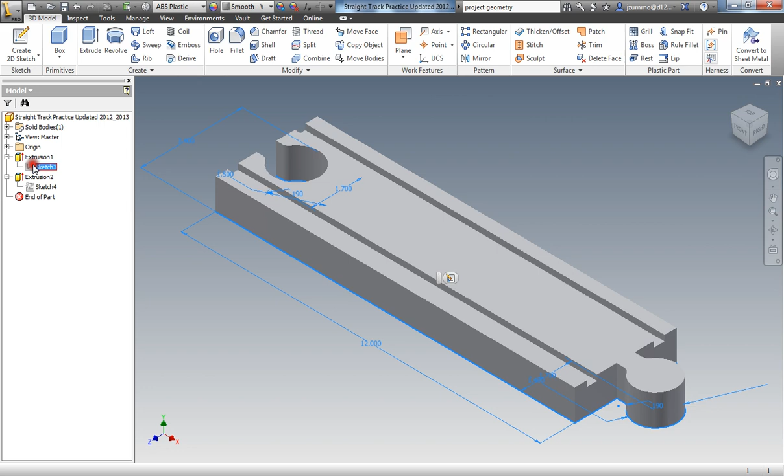I'm going to go over to Inventor real quick here and just show you a finished part. I have put this part together with the updated dimensions. It's pretty simple to make. We basically have this first sketch here. And you can see those numbers and the locations of these pegs and all that. And we extrude that at 1 inch. Of course, that'd be the thickness for our track piece.

And then we make another sketch on the back side of our part where we place some rectangles here, dimensions of 0.35 and 0.188. It's actually 0.1875. If I click that number here, you can see it's 0.1875. And then of course that is a distance of 0.4 from this corner to this corner here, and on both sides.

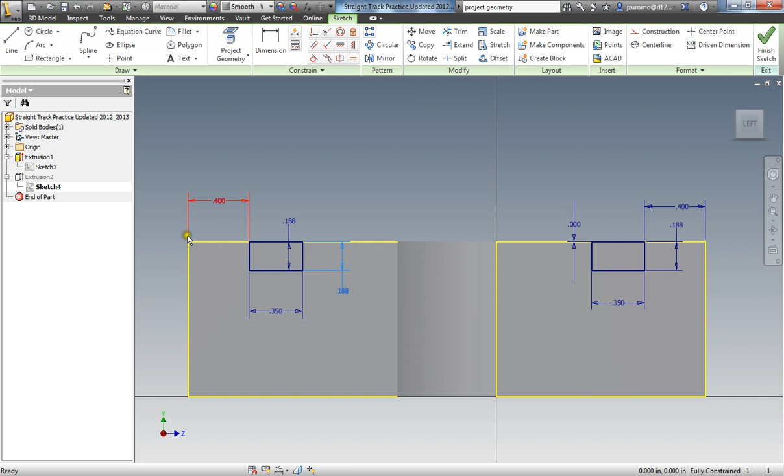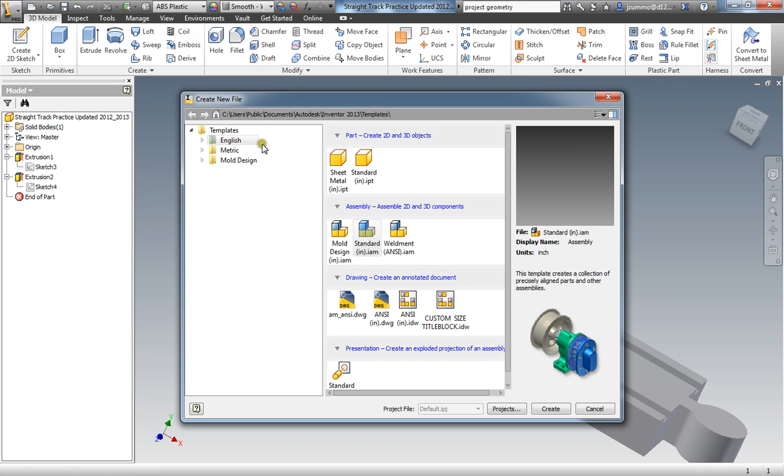Alright, once you have finished that sketch, you will then extrude it all the way through the part, and then that is it. And then of course set your material to ABS plastic. So I'm going to go ahead and create this part step by step for you. First I'm going to start off by saying new part, English tab, standard inch, IPT, create. I'll then create a 2D sketch, and I like to start off on this XZ plane, this flat plane right here. I'm going to select that.

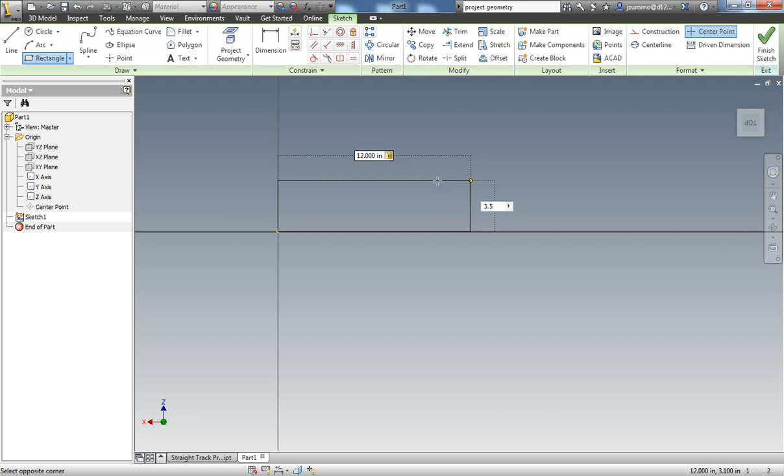And I'm going to pan over a little bit, getting my center point origin down in the lower left hand side. And I'm going to lay down a rectangle first. I'm going to click at the origin point and drag up and out to the right, and then type in 12 inches on the top, and then hit tab on my keyboard to switch to the other dimension, which I would like to be 3.4 inches. Once I have that number typed in, I hit enter, and here we have the beginning of our profile.

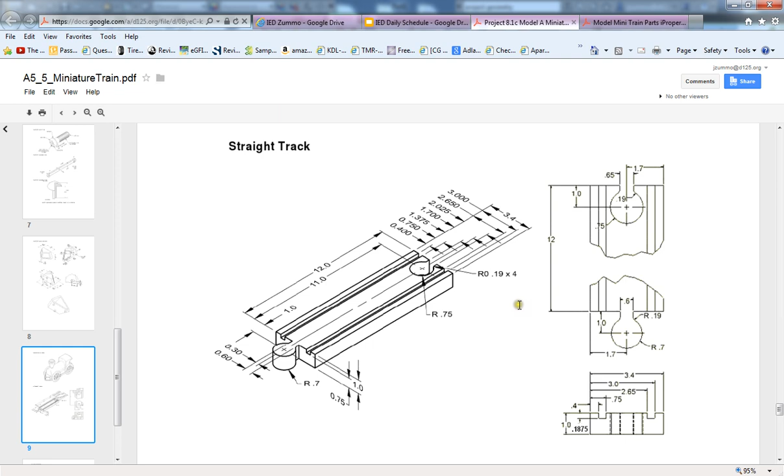I'm going to jump back to my other original created part. This is what we are going for, so I'm going to basically recreate this on our new part. I will start over here and create this cutout section here for the connector. If we look at our documentation, they actually have a little cutaway view here of a closer up detail of what that would look like. This is the outside portion over here. This is the inside one that I'm going to create now.

Basically what we're going to be concerned with is laying down a circle that has a diameter of 1.5 inches. This 0.75 is the radius, so a circle of 1.5 inches, and then we will locate it at 1 inch off the edge here to the center, and 1.7 inches from this center to this edge here, at which point I will then make some lines and offset them at a distance of 0.65, and then trim up and cut out and extrude that portion.

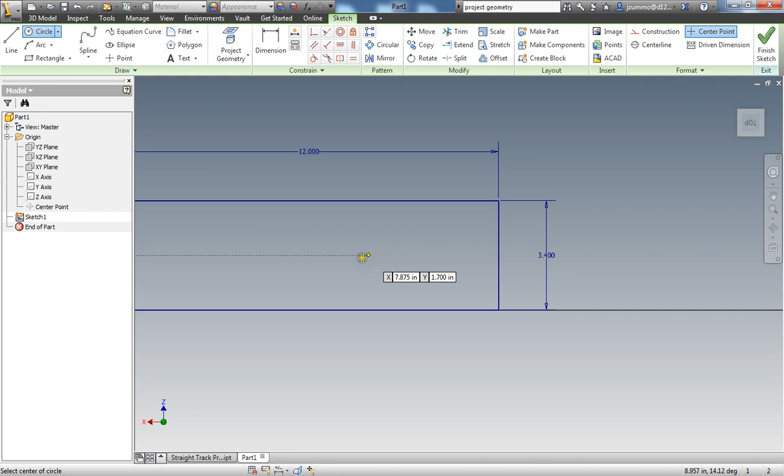So I'm going to jump back over to Inventor here. So again, I'm going to start off laying down a circle first, 1.5 inches in diameter. I will then dimension that circle into place.

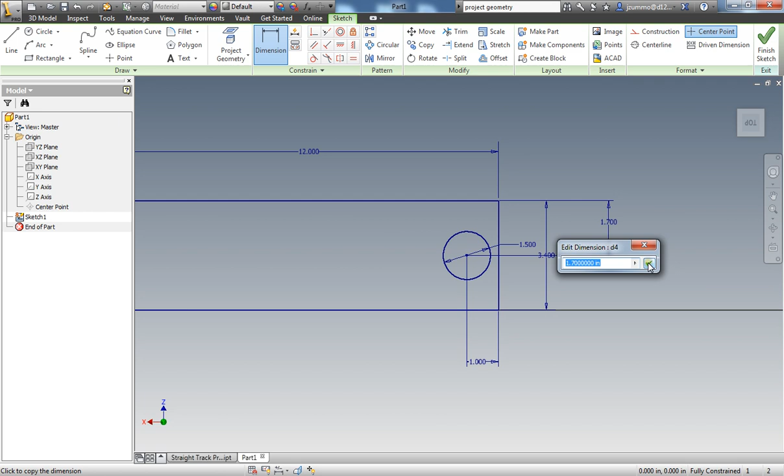That dimension here will be 1 inch. And from the center point to the outside line here, I'm looking for 1.7. I had actually placed it on that midpoint line originally, so that dimension is fine just the way it is. Now I will first place a line from the center point and just drag it out at any old distance past this line here.

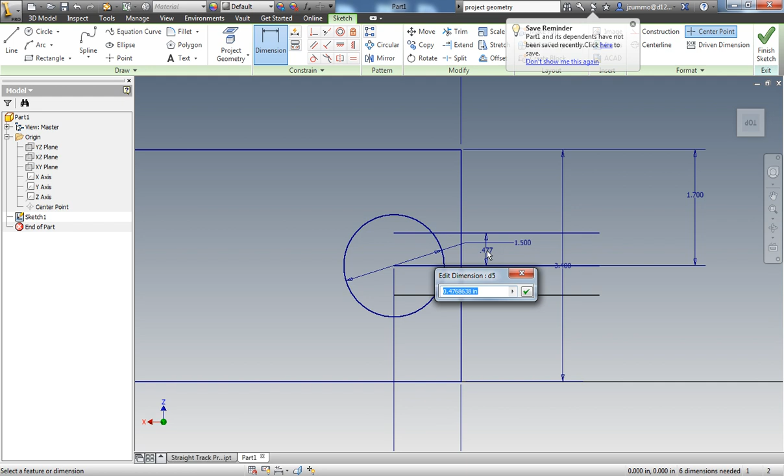And then what I'm going to do is use my offset tool to then select this line and offset it at any given distance. And then I'm going to come back in and dimension this line to that original line and say that that distance needs to be offset at 0.325, and then do the exact same thing to the other side, 0.325.

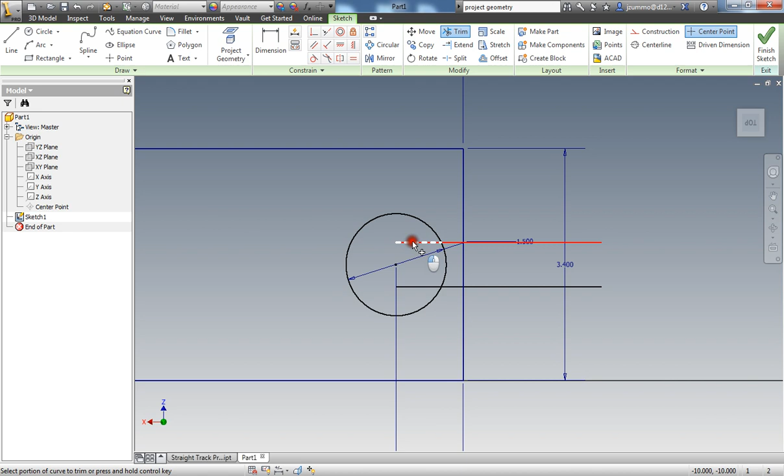And now I can trim away everything I don't need anymore, and I will have this side all wrapped up. I'm actually going to delete this middle line first because I don't even need it there. It'll just make trimming a little bit easier, and I can trim all of these edges out like so.

The next thing here will then just be to add that fillet around this edge here. Again, that new number for this here is going to be a 0.19. Then I'll select this portion of the curve and then this straight line here, and again on the other side to finish that off. Alright, well, I have this side of the sketch completed. I will now go over to the other side,

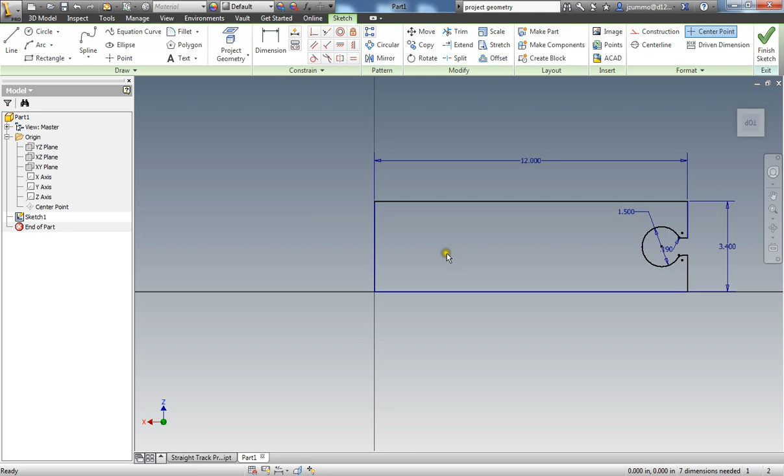and I'm going to go take a look at my documentation. And we have the same location for the hole this time from the edge, just going in the other direction off the part at 1.0 from center to this edge here, 1.7 from the center to this edge here. And then of course remember that we are now changing the radius to 0.7.

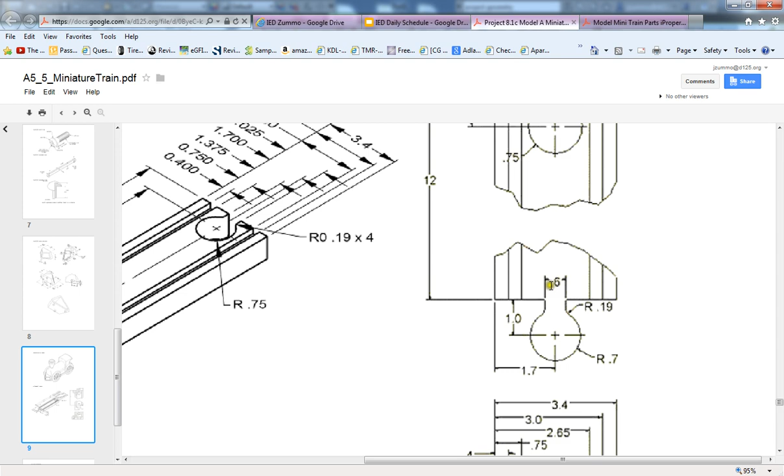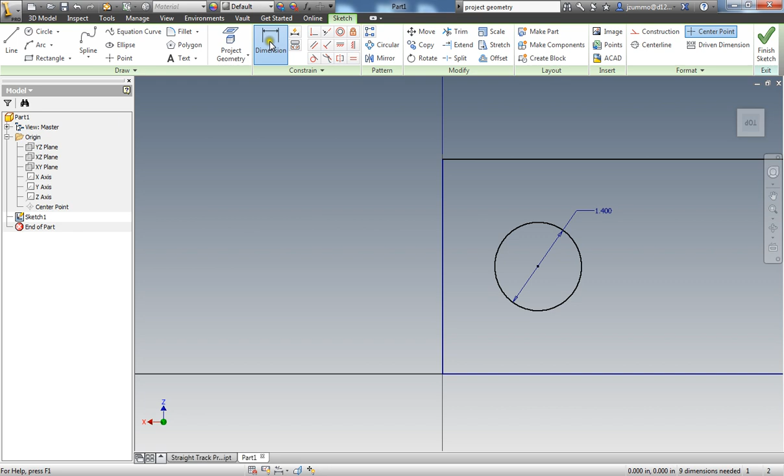And likewise, another change I forgot to mention earlier is that the distance between the flats inside of here is going to be 0.6, whereas up here it was 0.65. So I'm going to go ahead and start to make this portion. We'll lay down a circle first. It will be a 1.4 inch diameter circle. I'll then dimension it properly from center to here at 1 inch.

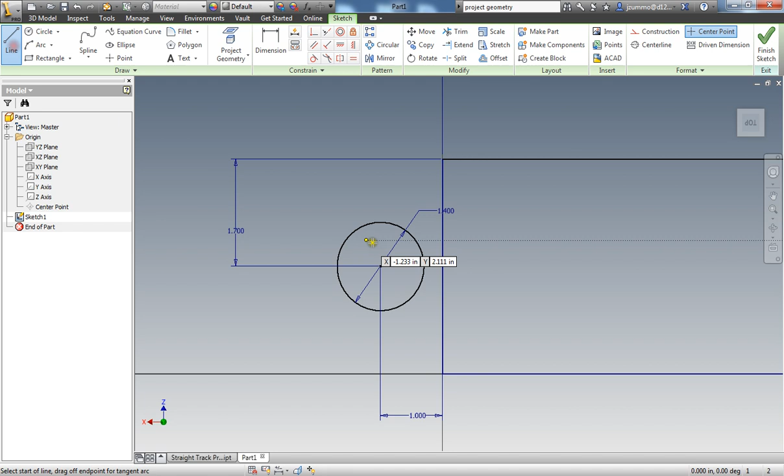Wait, actually, what I need to do, so I'm going to select the center point of the circle and drag it to the outside. That'll just make it easier to dimension. Now I can go from center to this line here, drop it down and say 1 inch. And then from the center to this line here at 1.7. Okay. Again, I will take a line from the center and bring it into the part.

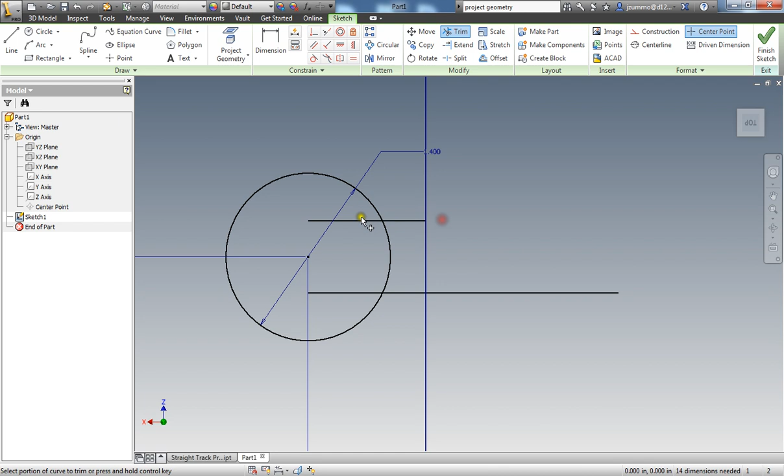I'll then offset that line in both directions, top and bottom, and then come back and dimension that distance. We had said that the distance between flats was 0.6, so if we cut that number in half, it'll be 0.3. So dimension both of these sides to 0.3. And then again, it's the same process, just clean up. So I'm going to delete this line first, and then trim out what I don't need. And there you have it.

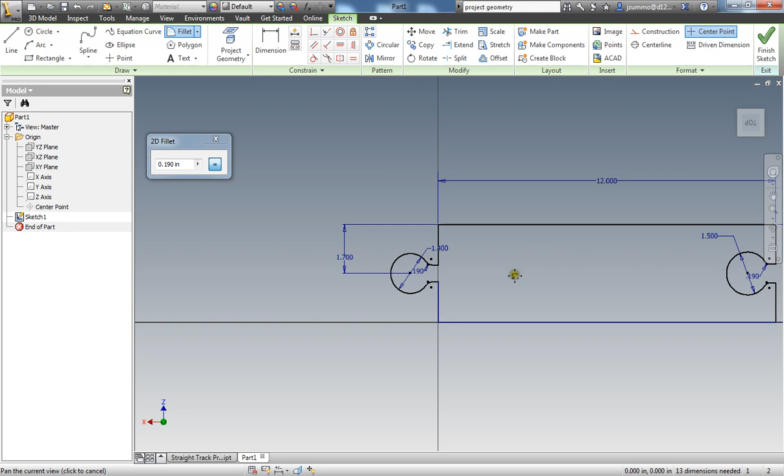Now I need to fillet these edges inside of here. 0.19. And at which point my sketch has now been completed. I will then say finish sketch. Hit my home icon here to zoom me out a little bit. Next, I can extrude that profile upwards at 1 inch and say OK.

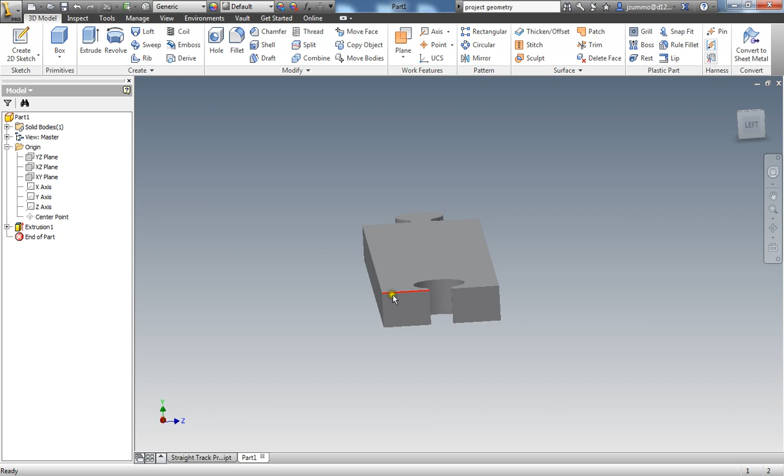And lastly, I will then need to create the rectangle profiles on the back side here to extrude them through the part and forward. First what I'm going to do is I'm going to project the geometry on this side so I can get both of those yellow boxes that you see here. I will then create my rectangles inside this area here.

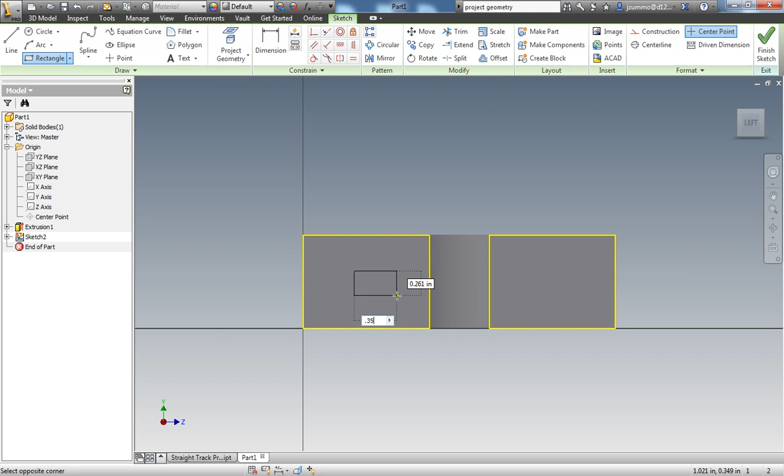The numbers for this need to be 0.35 along the bottom, and on the side it needs to be 0.1875. Just going to go back here and double check those numbers, and that is what we're looking for. If we do the math here, the difference is 0.35 and 0.1875.

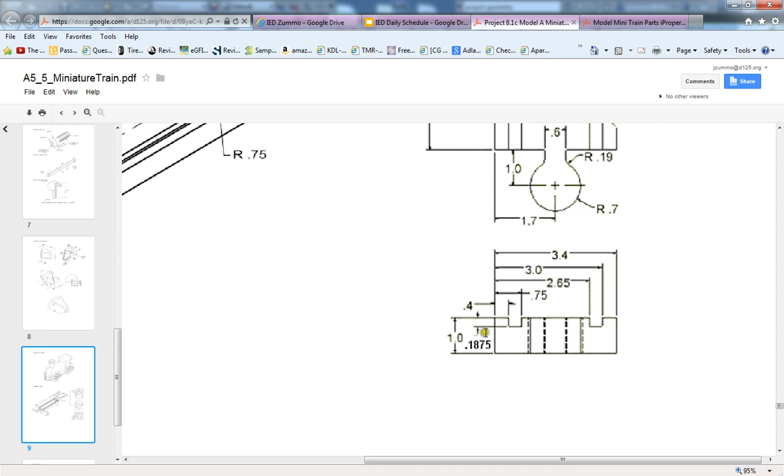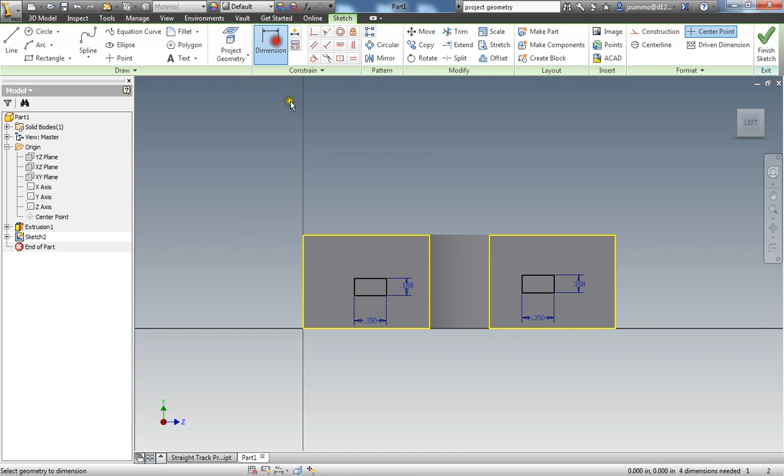Once I have that rectangle created, I'll actually do this other side over here as well. So 0.35 along the bottom, hit tab on my keyboard and type in 0.1875. And now I'm going to dimension both of these profiles into place. I will select the top line and the top line here, place that dimension and say it should be 0. I will then go sideline to this sideline here, and of course that needs to be 0.4.

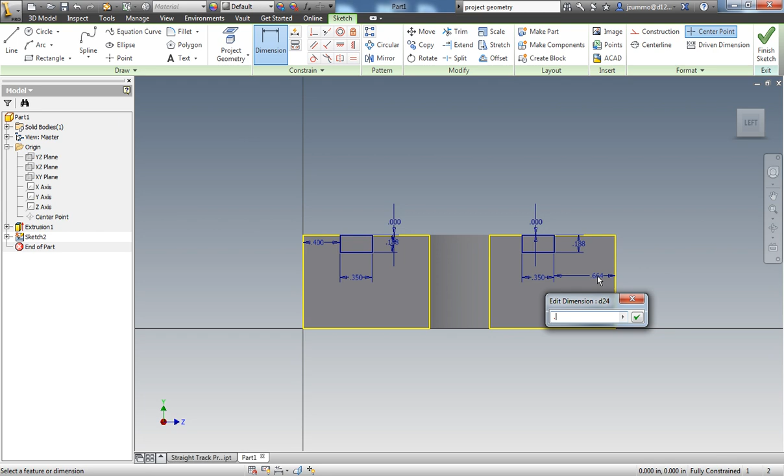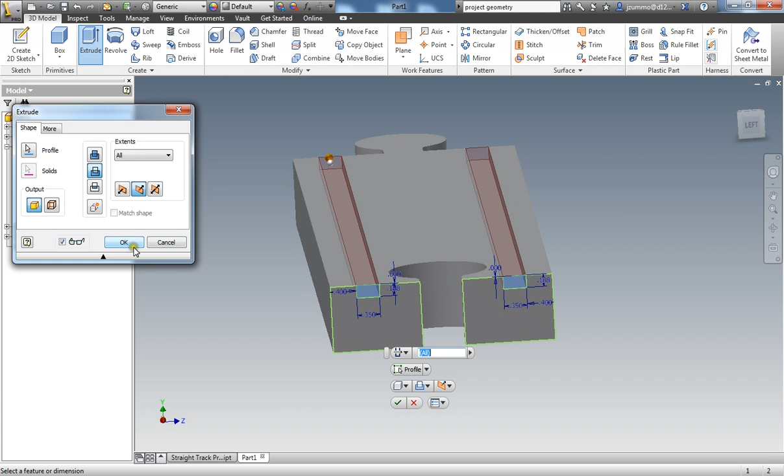I'll do the exact same thing to the other side. 0. Drop it down and 0.4. At which time I can now say finish sketch. And then I will simply extrude both of those profiles and cut them away from the body and set my extents here to all. They will then be pushed all the way through the part. I can then say OK. And we have our completed straight track piece.

Real quickly, I'd like to double check my iProperties. Switch over to the physical tab. I do need to set my material here, so I'm going to change that to ABS plastic. And here we have our numbers that have been generated. I'm looking at a mass of 0.1494, an area of 128.580, and a volume of 39.012.

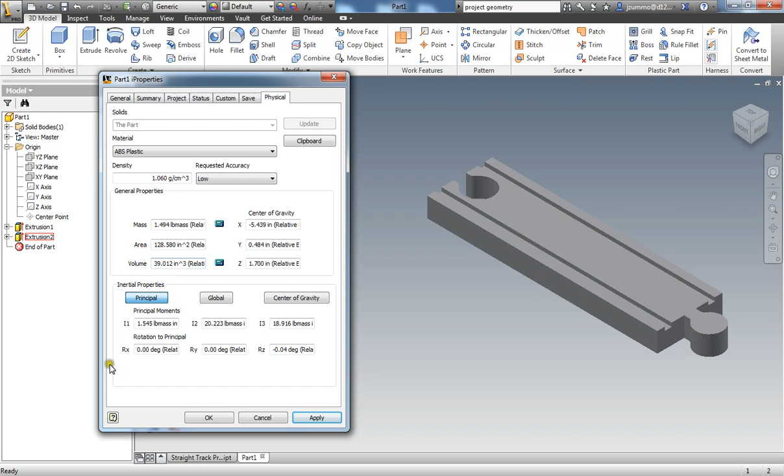So I'm going to jump over and then check my iProperties, and those are the exact same numbers that I have. So 1.494 pounds, an area of 128.58, and a volume of 39.012.